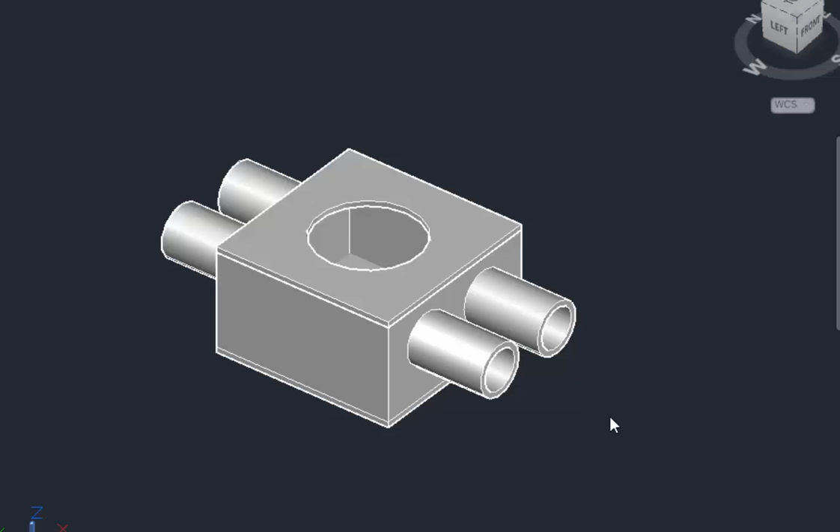Today we will draw a plastic connection box for electrical installations. At the end of this video, this casting material should look like this. But first we go to the project manager and we will make another new drawing for this casting material. So name it wall socket and give a short description. Then open in AutoCAD and you will have a new sheet ready for your drawing.

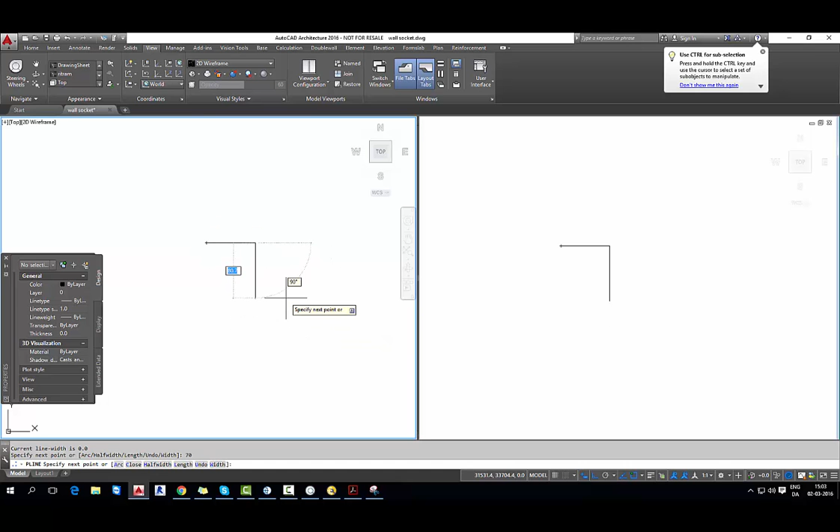But before I do so, I go to configuration and I split my desktop to two view configurations. On the left I will be drawing some primitives and on the right I will be able to see a 3D model. So now I indicate dimensions 50 by 70 and then don't forget to close the polyline. In order to indicate the thickness of this box, I draw some reference lines with the polyline.

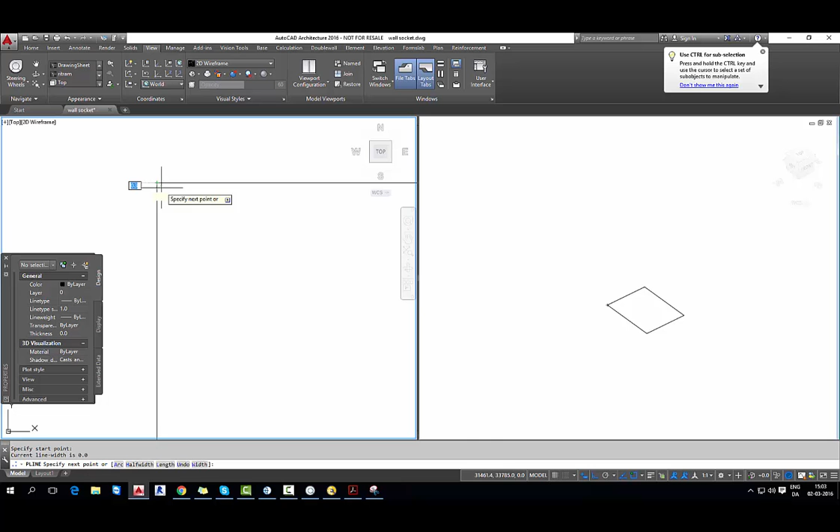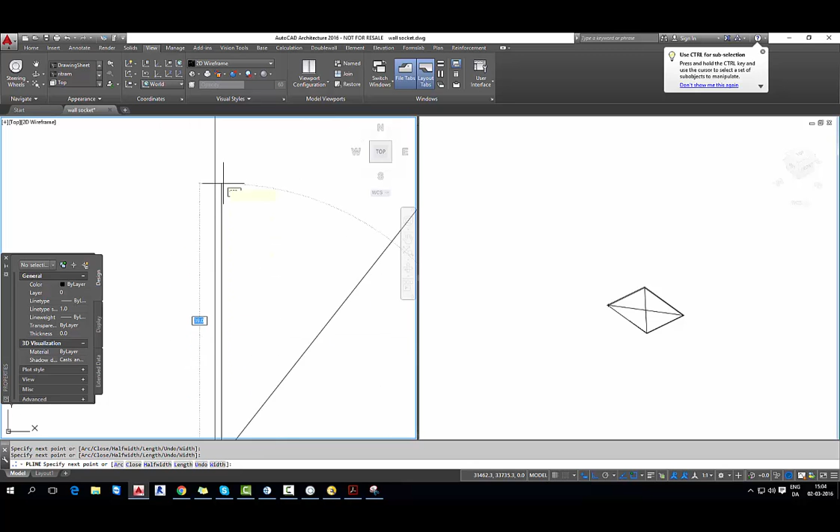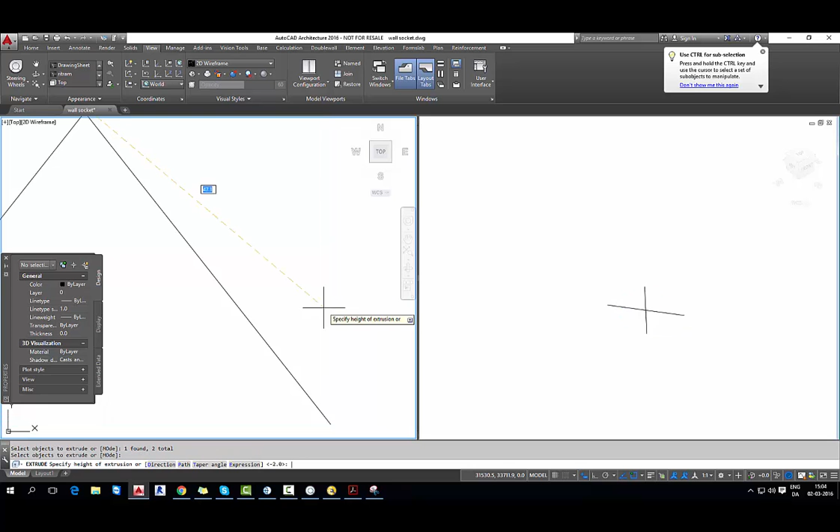And then I start drawing again polylines, inner layer of the box. And don't forget to close the polyline again. Once I have done polylines, I can extrude my connection box up. Select the lines you want to extrude. And then in a 3D view, you can see direction of the extrude and indicate the size of the height.

Now I will try to take out the inside layer. So I use command subtract and I select the wall element and the part I want to delete. Now I will draw the base polyline for my box base. And again close the polyline and extrude some millimeters again. I will make 1.5.

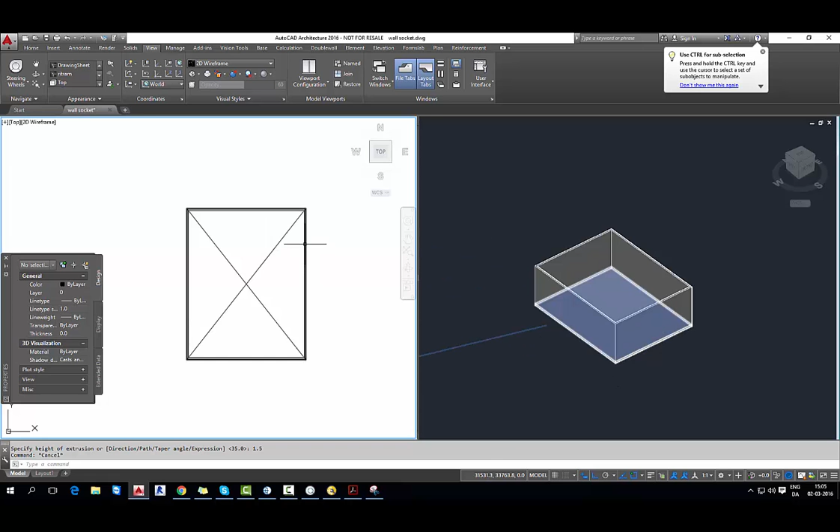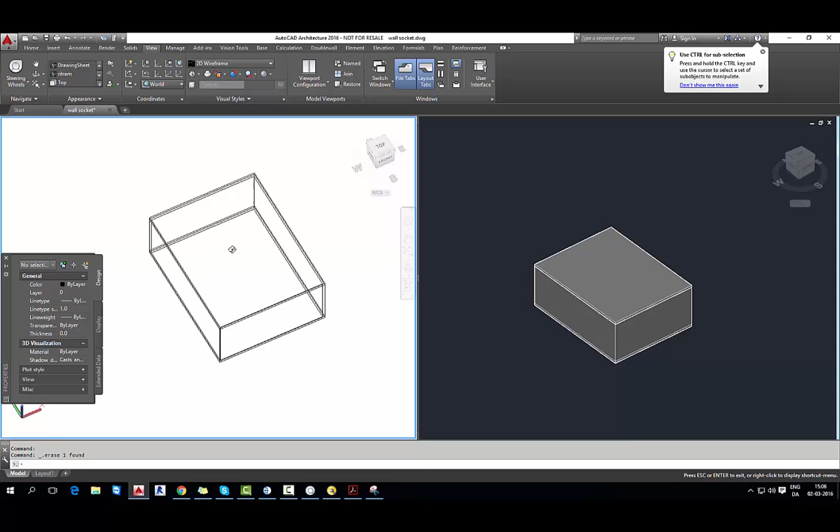And now I will draw the top of the box. Again, I draw new polyline, which one I will extrude again. And again 1.5. I delete my reference lines and we'll draw new ones on the top of the box. And for your information, if you don't want to use those commands in a command field, you can just simply go to solids and choose the commands from there.

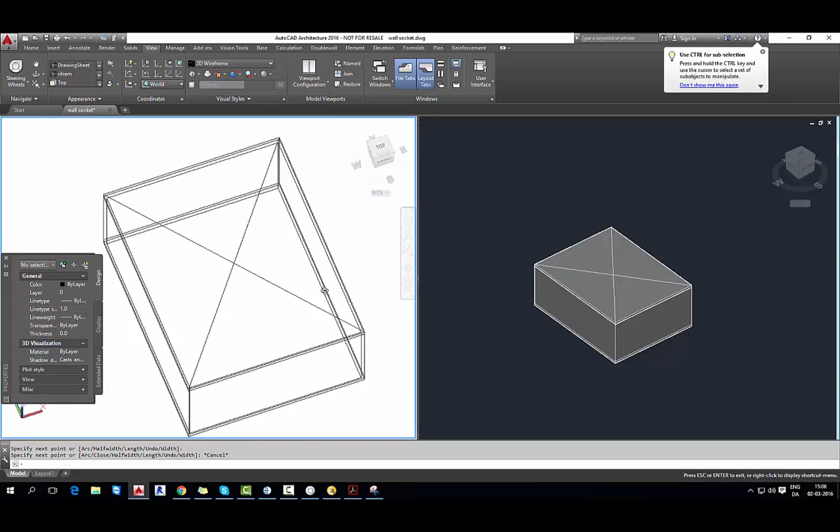Now I will try to draw a circle with my reference lines. And I will subtract the circle from the top of the box. But first I have to extrude it again in the right direction. I give 1.5 and take a command, subtract. Select the element you want to subtract from and the element that has to be deleted. I delete my reference lines because I don't need them anymore.

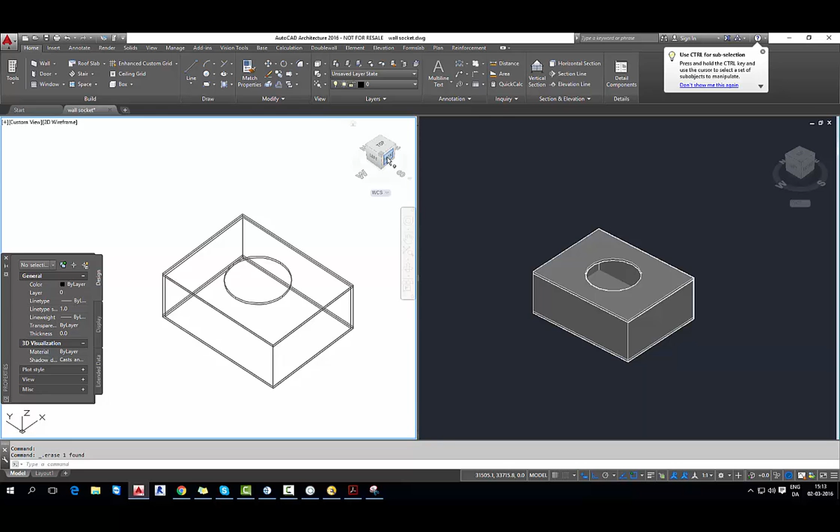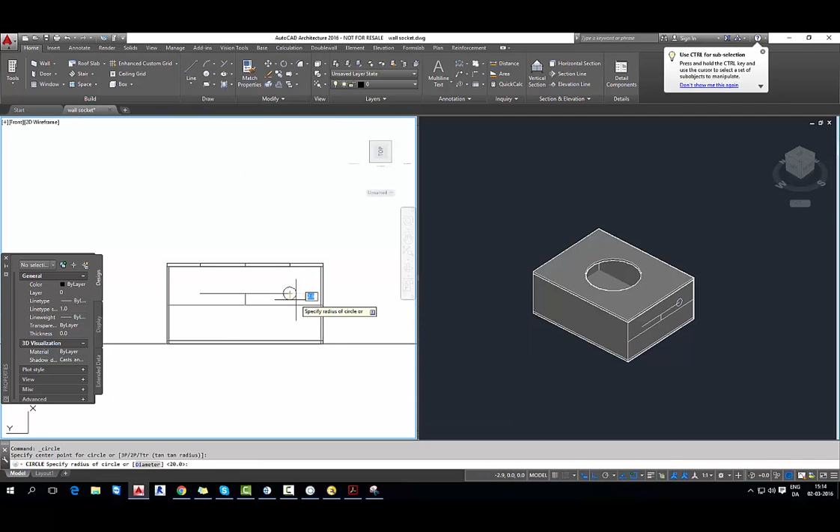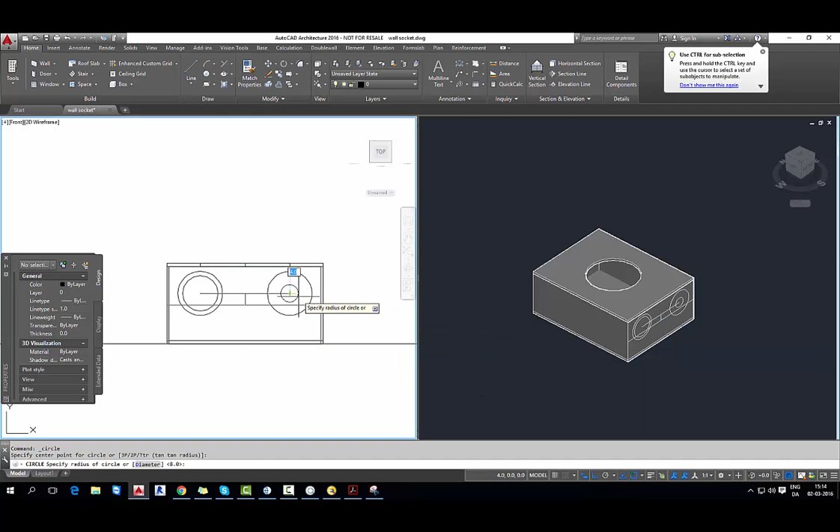Now I will try to draw some duct openings. Again, I make some reference lines with a polyline. And now I will take a circle shape and draw my duct opening. And now I will try to draw a shape for my duct tube. So I draw inner circle, delete my reference lines,

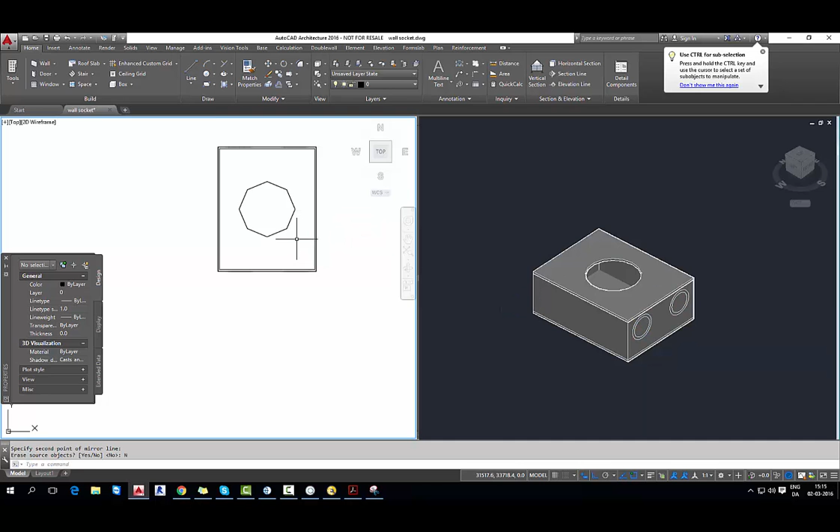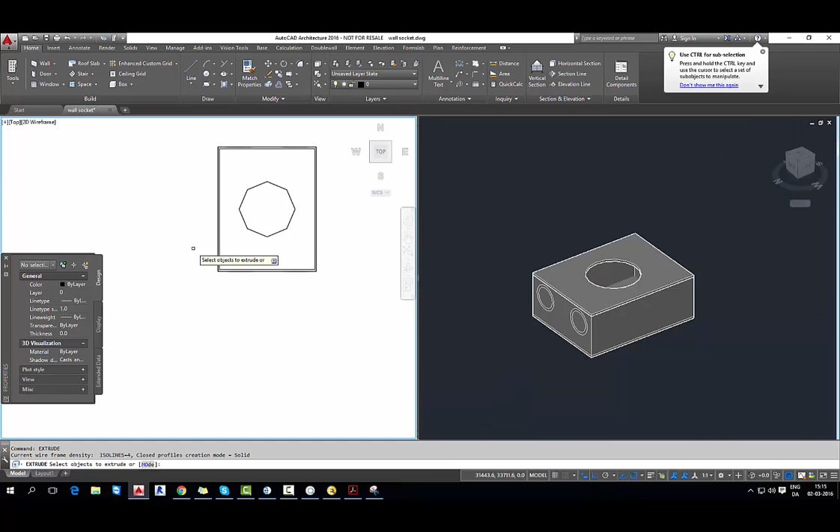and now to make it easier, I just select those circles and I will mirror them to the other side. Then I go to the top view and find the center line. I leave originals and now I have the same shapes on the other side of my box. I will take again the command extrude and I will extrude those openings. So I just simply select the outer circle and extrude in the right direction. I do exactly the same on the other side.

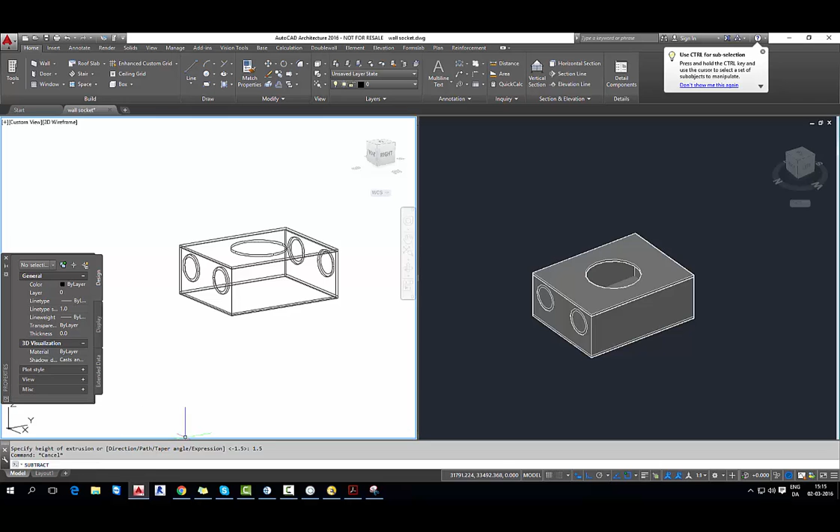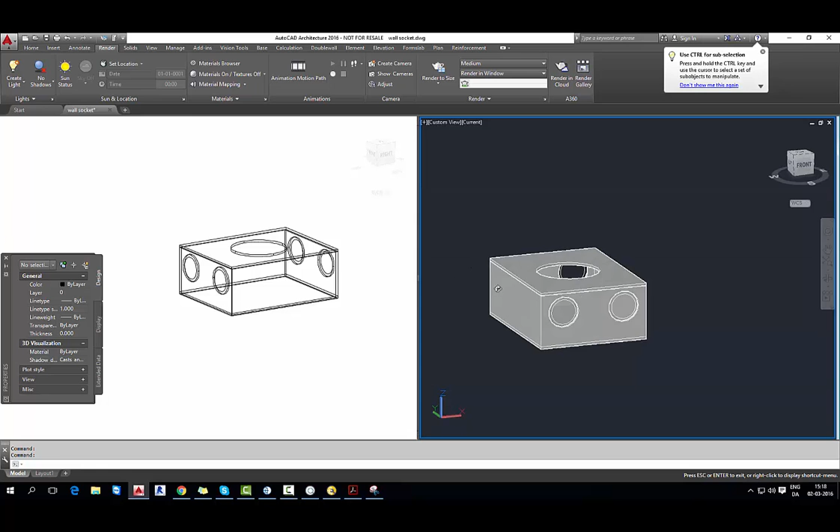It is very important to remember the right measurements and take the specification measurements from the supplier so you draw a right box that can be actually used in real life. So now I just take the objects I want to delete and confirm. Sometimes it's hard to see, so I just render materials on, and now I can see the openings and the shadows on and the other edges. I can see through, so actually we made the holes.

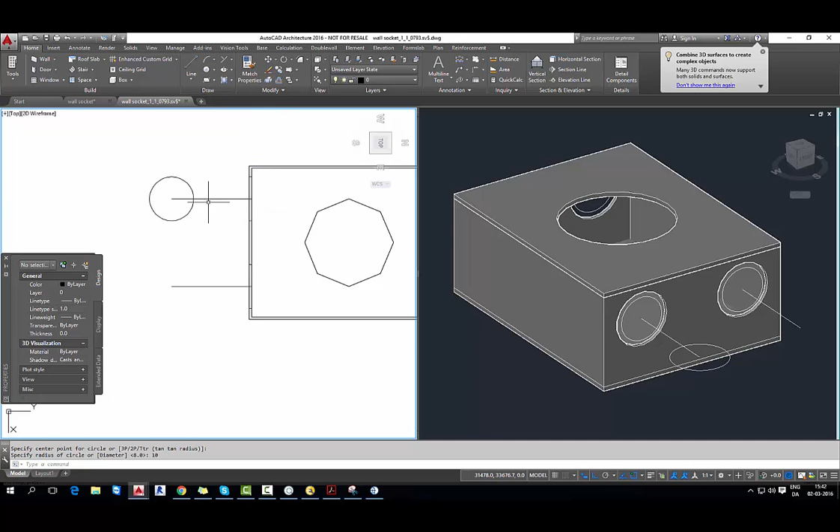Now I will draw some path for the tube. Again, I work on one side and then I will mirror them to the other side. I go to the top view, select those two reference lines. But before I do so, I make another circle and indicate another circle that actually makes the thickness of my tube. And then it's very easy to rotate in 3D, so just type in the command 3D rotate and select the objects you want to rotate and what axis you want to use.

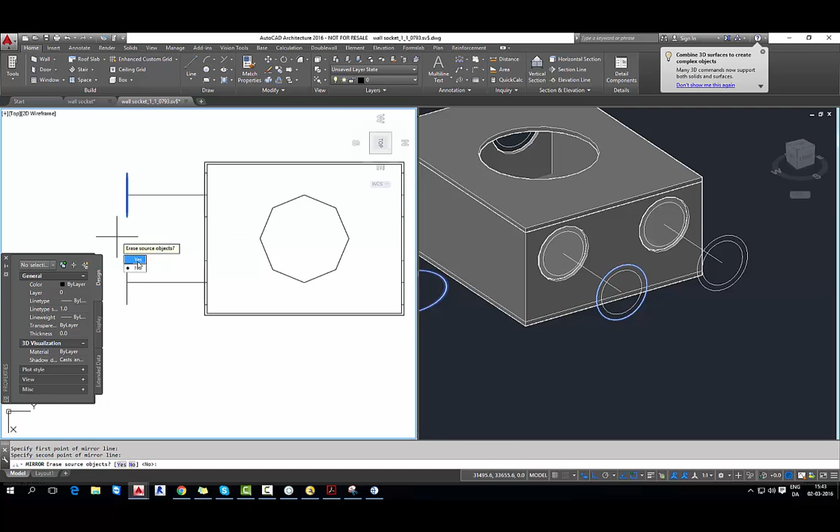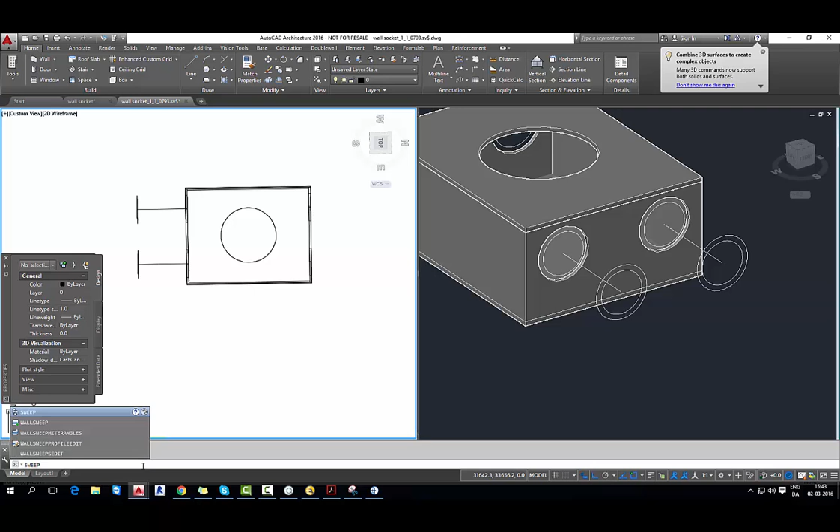So now on my top plan I can see that I have it rotated, and I just simply select this shape and mirror to the other side, and the same with the path and other circles. I mirror them to the other box side. But before, I take a sweep tool, I select the objects I want to sweep and then the path. And now I can see that I have my tube with some fill inside. I will delete this fill by the command subtract again.

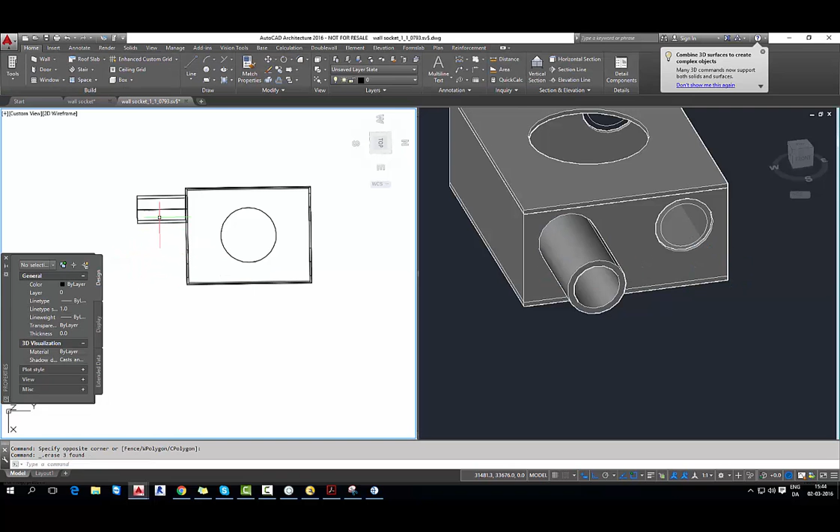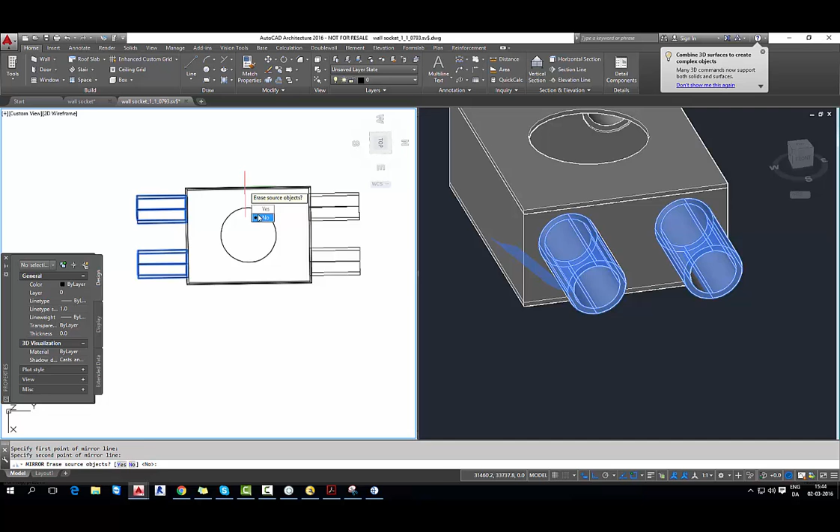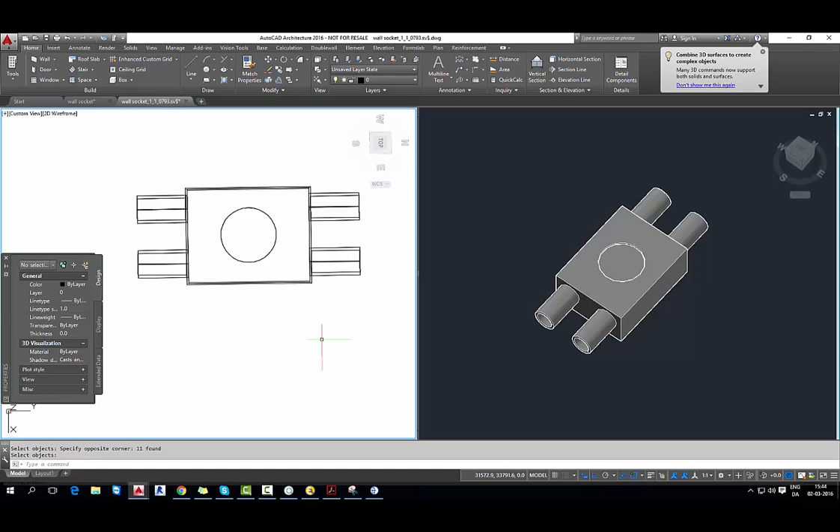Now it is easier just to delete the reference lines and just take this object and copy it to the other side. But you can proceed in both ways actually. Then select again and mirror. Now we have our connection box done, but there are several steps we have to proceed with. So first, I will make a union to have one big piece of this connection, because now we have several parts, and this will help to make an assembly. Now if you try to select, it's one piece.

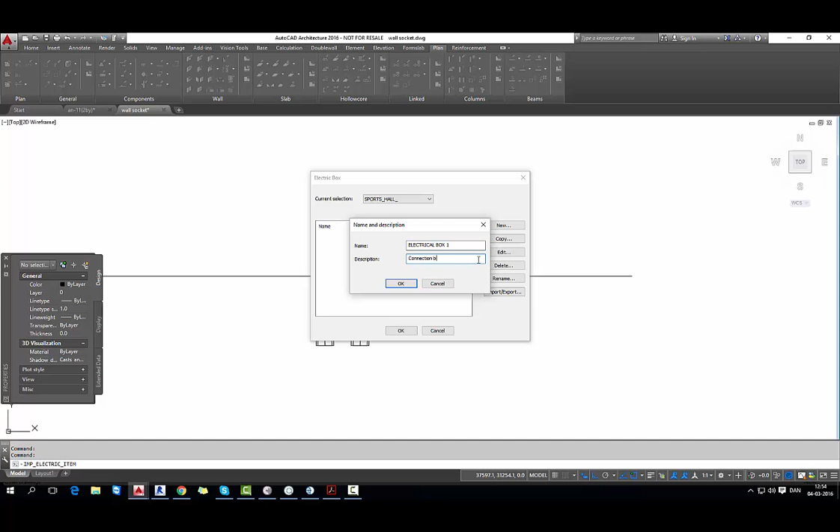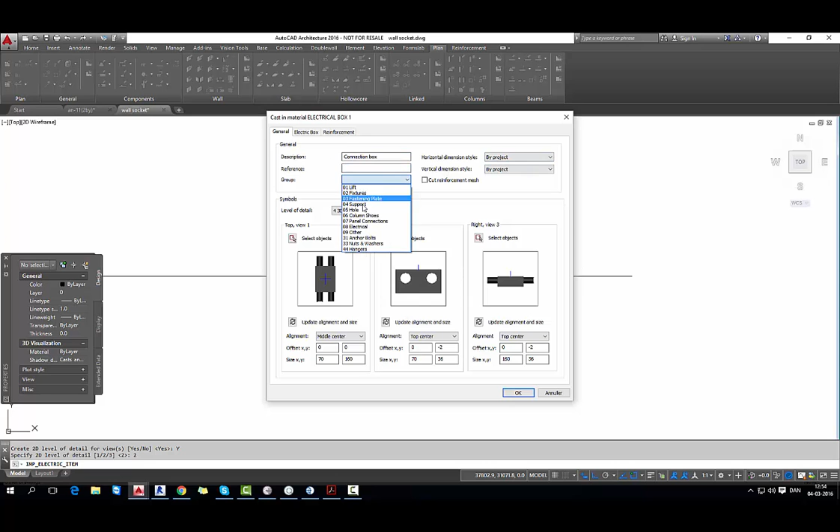I have drawn some origin lines to indicate my origin point, and now I will make a new cast in material. But it's an electrical box. So I take for 3D model, and then I select the object I want to have views from, and then it comes automatically. I can write some reference and assign it to some group to make it easier to find my cast in material, and then I describe a little bit about my electric box. I don't have any reinforcement here, so I just confirm.

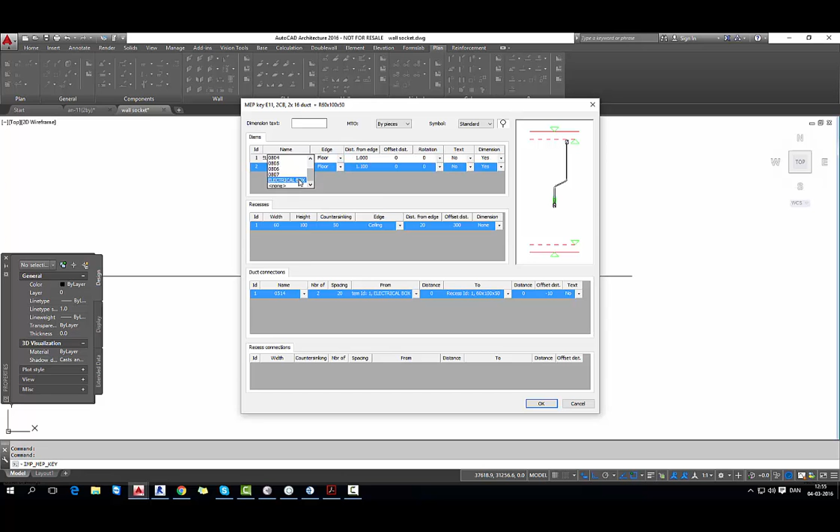Now if I go to my MEP keys and try to edit my previous MEP key, I can basically switch the new item and save it. Now we will try to go to our previous shop drawing that we have made. So I go to the project manager and open it. And I can't see any changes yet, but if I click on element and generate the element, I will have some updates.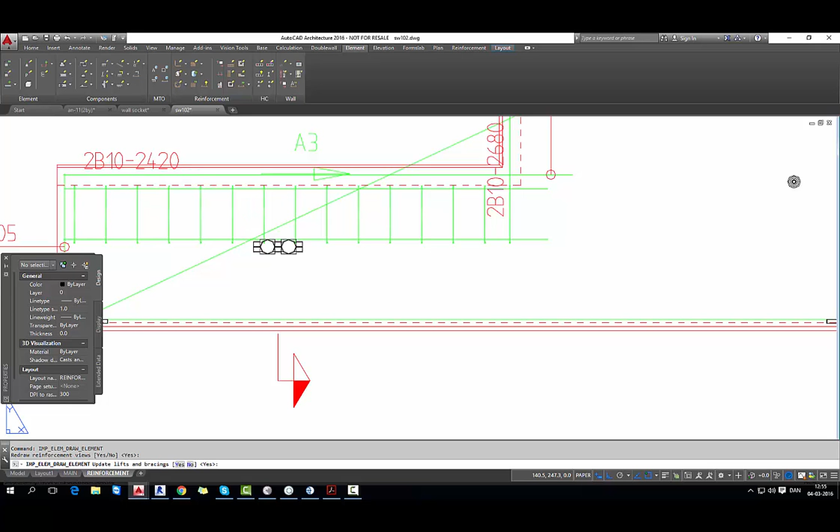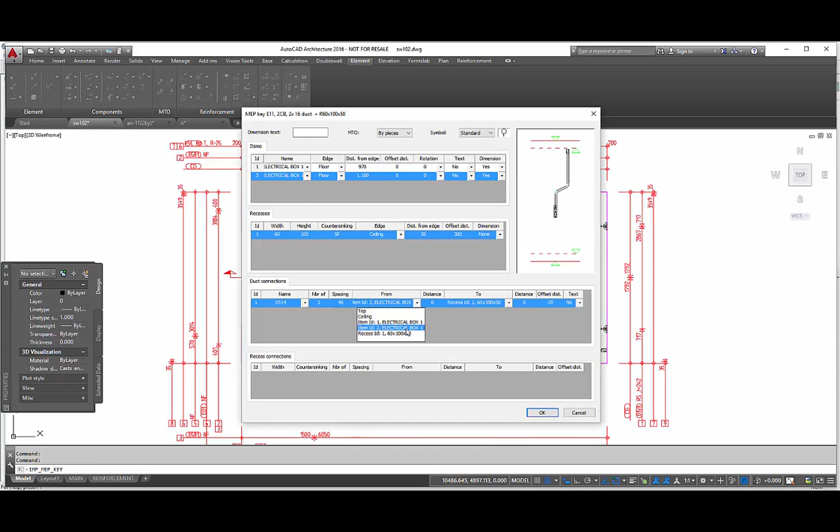And that means that I will see my new MEP key on my element, but it's not in the right position, so I will try to edit. I go to MEP keys and edit the previous MEP key by typing in new value for the placement. And again, I generate the element. And now I can see that it's actually moved.